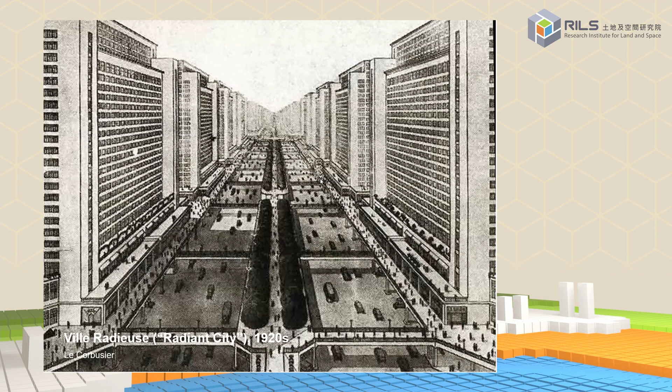Now, nowadays, of course, we always copy the first part of his vision, which is concentrating people living in high-rises, without copying the second part of his vision, which is leaving the ground plane as park. This is, of course, a result of the building economics, but let's not forget the total concept of living is not just putting people in high rises, but also the emphasis of open spaces.

Then also Frank Lloyd Wright, of course, we cannot talk about architecture without him. In his thesis, he actually proposed the idea of the Broadacre City. Now, interestingly, the Broadacre City is an anti-city. What do you mean by anti-city?

He was actually conceiving a kind of living habitat without going into the fashionable suburban sprawling residential district culture. He was envisioning a city of a self-contained city with offices and residential buildings and also transportation modes outside of the city center, but in the suburb of the city center, without the need to go into very small scale the suburbia that we see today.

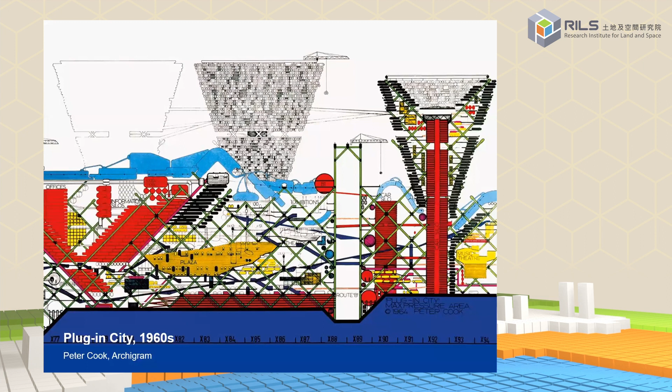As we move along the timeline, the technology advances and new imagination came along, and with all these ideas and the possibilities opened up by the latest technology also put into the city, literally taking the word putting into a city. Therefore, the plug-in city concept came not as a surprise from the archigram in the 60s and 70s.

Imagining that this city we can just put in functions. Now, the interesting thing is, although these drawings look like a kindergarten drawing, the idea behind that is all these functions are like modular elements that we can plug in. We just need to add in functions to enrich the city life, to make life interesting, to make a city vibrant. We can plug in these elements as we wish.

It's a very powerful and futuristic idea with a lot of foresight.

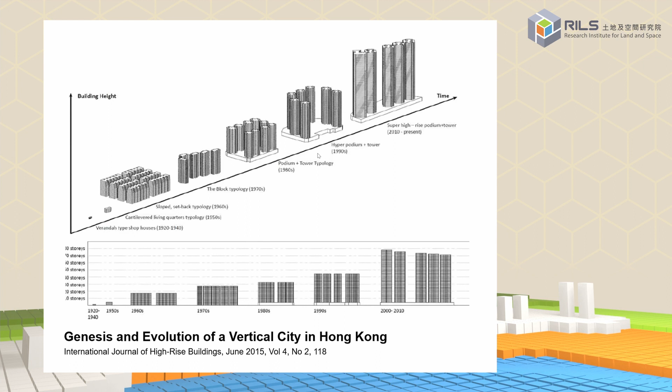But we also developed something interesting and quite unique in Hong Kong. That is the podium approach, that every estate or tower block is supported by a self-sufficient or at least certain elements of commercial activities at the first few floors, usually the first 3 floors, housing the daily necessities and errands for the inhabitants above. And then this podium is also connected to a nearby transport infrastructure, making mass transit very efficient, very sustainable, and also making the intra-district connectivity possible.

Now, of course, with this, we are building more and more footbridges, more and more horizontal connections between podiums, between different environments. We then need to stop just building this for functionality and simple connectivity, but to think what can we do to improve this new form of habitation. You spend so much time traversing from one area to the other horizontally, above ground, above the traffic, in a car-free environment. We started to think about what more can we introduce into this form of connection beyond just functionality.

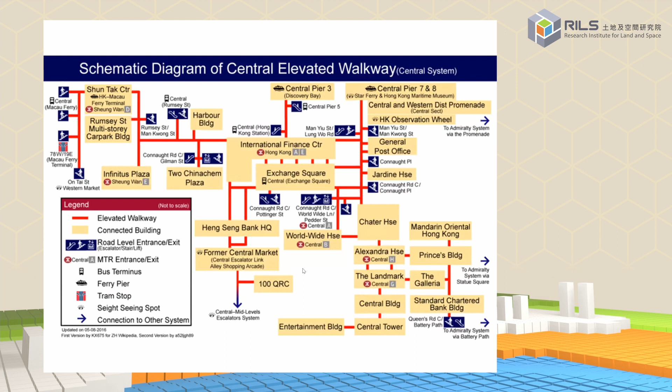To a certain extent, we are not just extending the bridges from buildings to buildings, we are extending the bridges and escalator connections from district to district. This is a very famous project done 20 years ago, a subject of investigation in the world, connecting Central to the mid-levels and facilitating the communities above and below on their daily commuting between the two districts. But looking back, is there anything we can learn from this exercise? And is there anything we can move on to progress from it for the next generation connection mode?

We try to look at some interesting foreign projects. This one is from New York, the very famous High Line project. It was a defunct elevated viaduct railway line, and the city council was on the verge of demolishing it, and then it was intervened, and somebody proposed a very daring and interesting idea of why don't we keep the viaduct, but change the defunct viaduct into an urban park, an elevated urban park, giving some green space back to the city without taking away the ground floor. The project has been a phenomenal success.

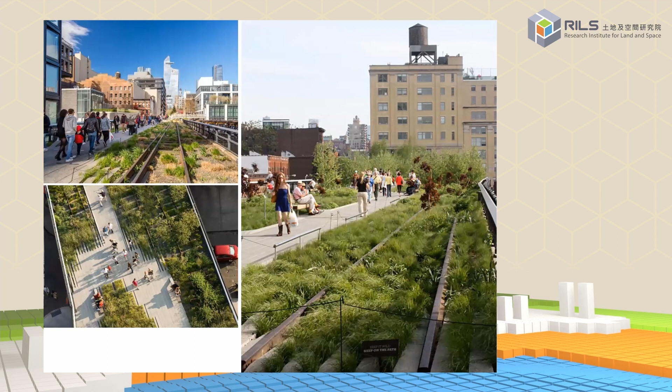It has been published worldwide, and it is a key feature of New York now. I'm sure if you go to New York now, your friends will probably bring you to the High Line to have a nice stroll in the afternoon, to enjoy sitting around, just simply be there with the green and among the buildings from a different perspective.

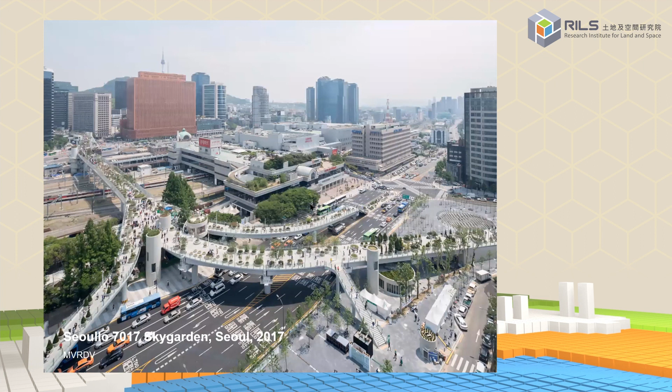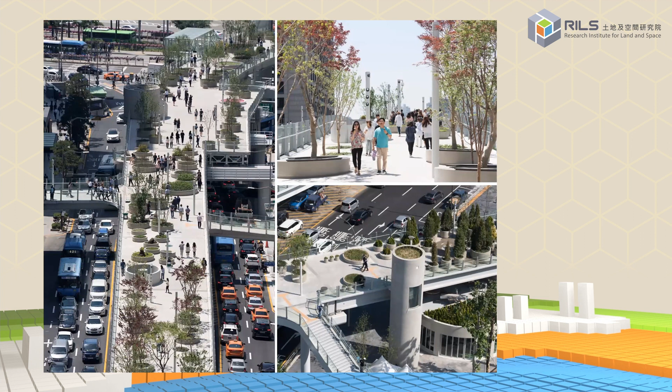Another interesting project, this time in Asia, in Seoul, a country very close to Hong Kong. Again, in Hong Kong, our typical highway structures and bridges are purely functional. The fact that you propose to put some plants in the highway bridges will scare many officers pale-faced, because that would obstruct and take away the effective width of the thoroughfare. But in this project, the elevated walkway is dotted with different sizes of planters with substantial planting to improve the walking environment from one space to another, making the connection not just a programmatic, functional exercise.

What we can learn from these two projects is that the functional need doesn't need to stop just there. There could be more to go into the functional need to make it an interesting and memorable experience.

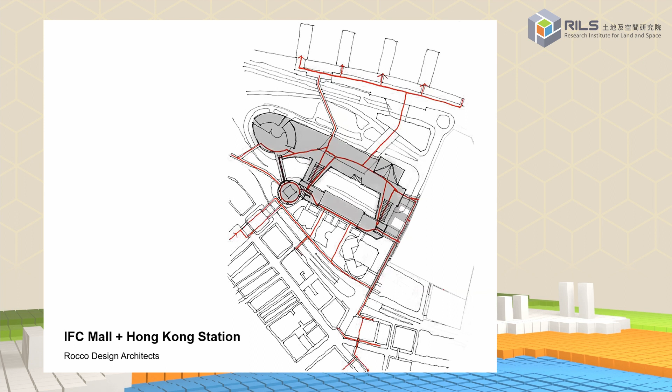Coming back to Hong Kong, this was the IFC development. We worked on it something like 25 years ago. Our office was the architect for the whole development. And when we proposed this development, as you remember, it was reclaimed land, basically flat reclaimed land with nothing. So the entire development, with the station box construction for the Airport Express railway, was constructed with the idea of bringing activity from the then center of Central to the waterfront, bringing people from the Pedder Street area, from the Queens Road area, to the waterfront, starting from scratch with nothing.

So naturally, the idea of connecting with different footbridges to make the connections is very important, because there are many roads to cross: Queens Road, Des Voeux Road, and also Connaught Road, three major thoroughfares with very heavy traffic. Therefore, elevated footbridge connection becomes a very natural choice for us.

But what we propose is that instead of just connecting with footbridges, we were looking into how do we enhance the experience of crossing, how do we enhance the experience of this newfound elevated land in the air. What do we do with it, and what opportunities does it offer?

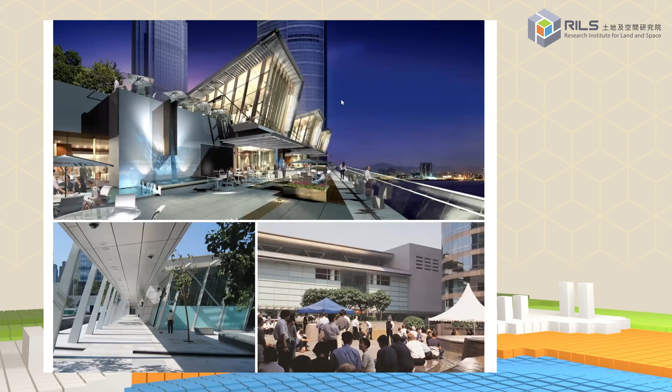With the IFC project, we noticed that the creation of spaces is very important. The creation of these small, identifiable urban spaces at elevated level, surrounded with natural landscape, is very important to make the space pleasant, to make them intermittent destinations, to propel the circulation of the people.

Nowadays people remember the iconic Apple Store on the retail mall, but few would realize the Apple Store was actually a store in the air. It is a store built on the footbridge across a major road, and therefore the concept of propelling people, the footfall of the circulation with activities alongside, with the commercial elements alongside, is very important to capture the critical mass of circulation to make the space vibrant.

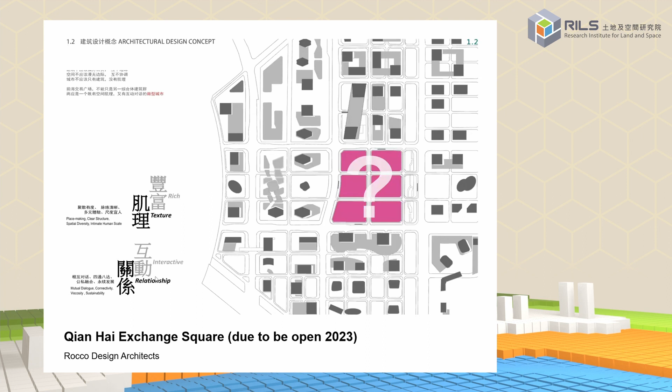Next project is in Shenzhen, China. We are the architects of Qianhai Exchange Square in this project. The brief was very interesting. In the beginning, this area consisted of 6 lots, with 3 roads transversing and bisecting all the lots into individual 6 lots. It was a competition, and we won the design competition with the job. Our concept was very simple.

Instead of 6 lots, we created an interconnected deck, creating a town center, creating a focus for this newly developed area of Qianhai, and also making this a landmark for Qianhai. Instead of developing the 6 lots individually, we developed it as one big conglomerate site with functions appropriately positioned, with offices, residential, hotel, retail, and everything to make this a comprehensively functional as well as pleasant environment. This decking over also serves the fact that we are hiding all the transport and car park facilities down below, making this a car-free zone at the elevated deck.

In this project, we also learned that in order for it to function and to work, it is not just the physical connectivity, but you have to create physical interfaces with the different spaces so as to create opportunities for the activities. The opportunities for activities is like a chessboard you set up and let it evolve organically with the functions and commercial activities, well calculated but not too defined, giving some air for it to develop in the long run.

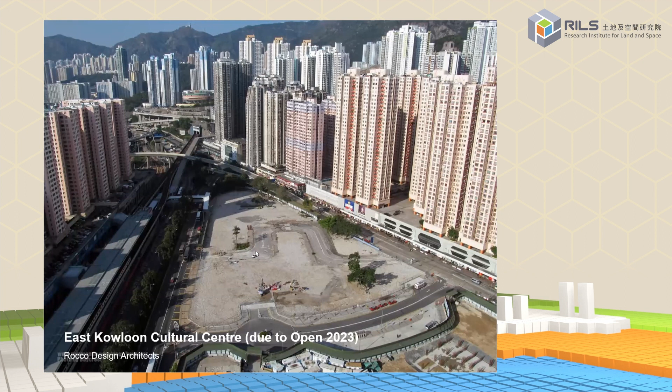In this wedge shape, we have to fit in a 1,200 seat theater, a 600 seat smaller theater, and numerous other cultural facilities.

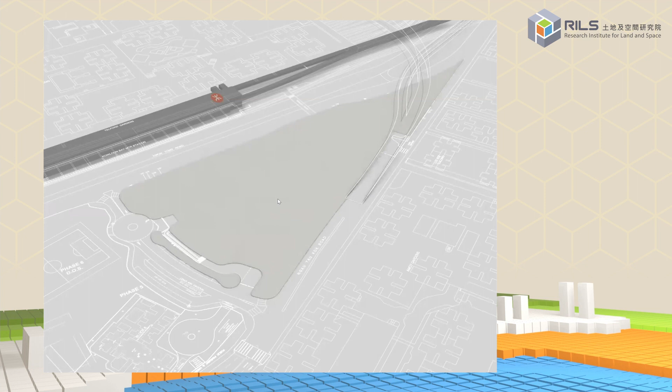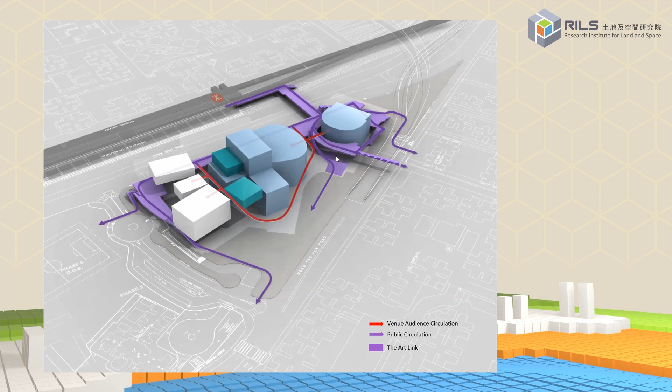What we decided to do is, instead of having connection points to the station and to the residential tower on the right, we make sure that the circulation of people in their daily lives must pass through the complex, the cultural complex. And therefore, because of the commuting every day, the people will be exposed to the events of the theaters. The cultural events will become an interesting, ever-changing facade of activities along the way, making the journey pleasurable and different every day, every week.

We created this circulation system that is very intricately overlaid and would not interfere with the ticketed circulation, with the open and uninterrupted public circulation, so that people traversing the area during the daytime and nighttime peak hours to the station can pass through these areas and then be informed of the cultural activities. In so doing, we hope that people's lives could be enriched by the cultural events.

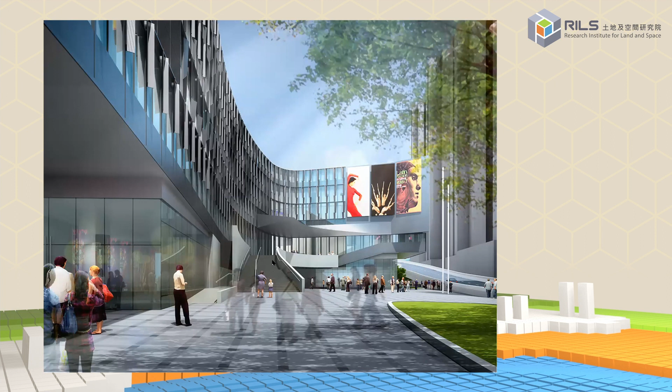The external area is also a series of circulation ramps and stairs connecting to the neighboring districts over the two motorways, highways on the two sides.

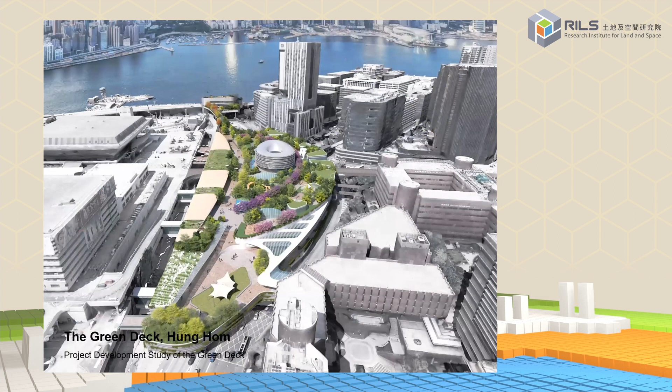So with the three previous project experiences, we know that we need to create commercial activities and create enough activities to activate the space. We need greenery to make the space more pleasant, more responsive to the season, and also more environmentally sustainable. We also know the idea of creating sufficient physical interfaces to make this an area poised for organic growth, to allow opportunities for people to take ownership of the space and develop it according to the natural process. We also know that we need to introduce some culture to enrich the lives of the people.

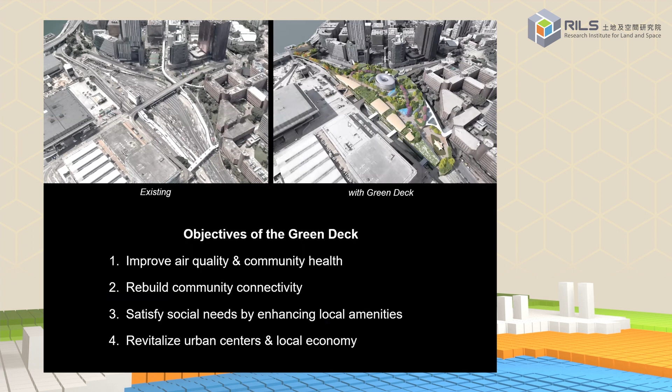These are the strategies that we use to ensure the objectives of the Green Deck are fulfilled: to improve air quality and community health, rebuild community connectivity, satisfy social needs by enhancing local amenities, and finally revitalize the urban centers and local economy, which is important to sustain the workings of this concept.

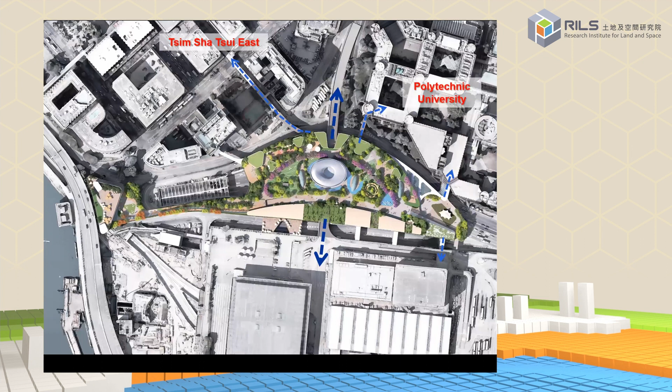In this project, we have created so many different new connections, also with the old connections, so that the idea of having this raised car-free zone becomes a destination in its own right.

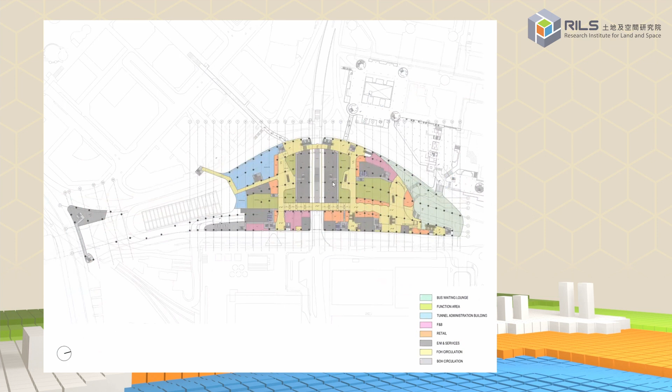So this is the end of my presentation. I hope you enjoyed the project, and we look forward to it coming to fruition soon. Thank you.